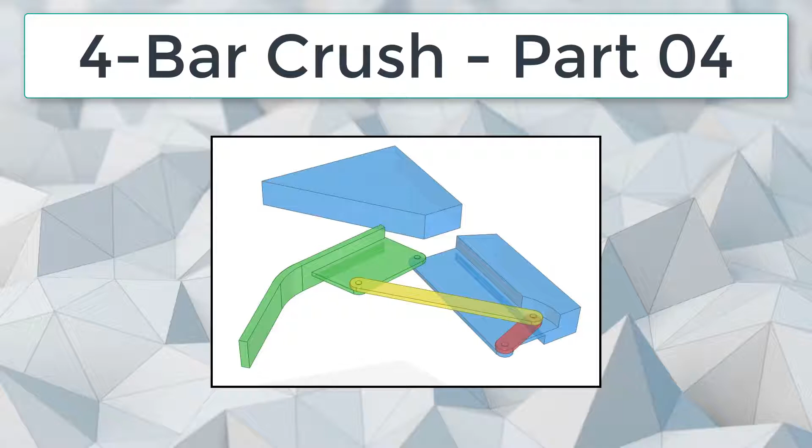Now, engineering is all about give and take, and while we might like this change, it's messed something else up right back here. This is interfering as this sweeps around. So how do we fix that?

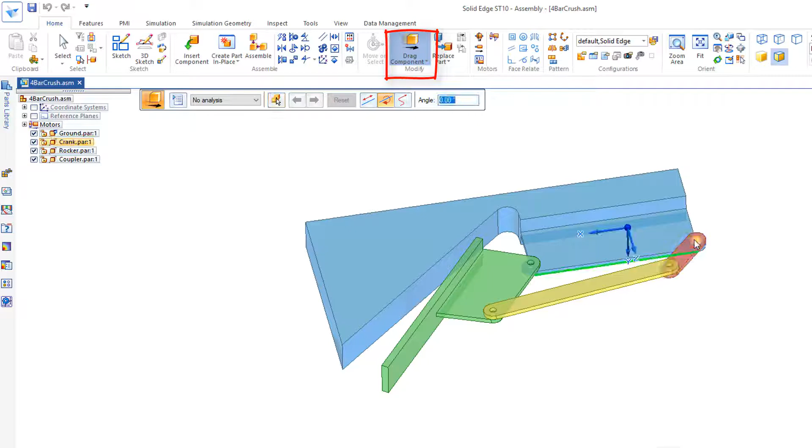Let's jump out of the motion. We can go back to drag component and just touch on that link and swing this around and look what's happening here. We'll swing that, hold it down. We can see it's interfering right there.

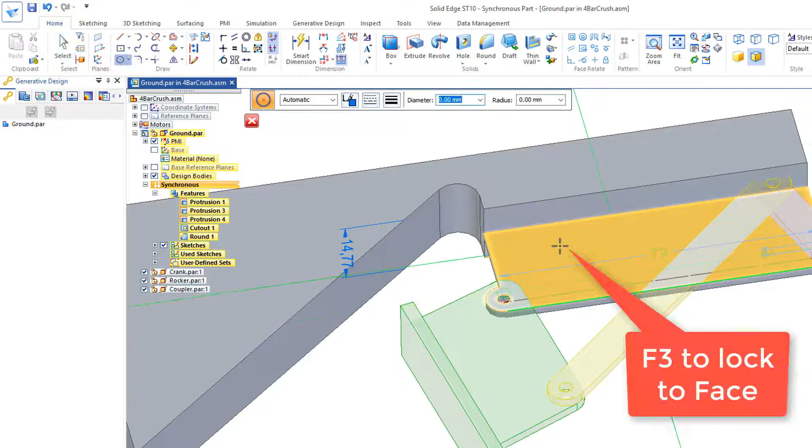So what we could do is go back here, open this part, and we could push this piece back, this face. We could simply push that back, or we might want to just add a circle. And I could just go on to this face right here, and I'll hit F3 to lock.

And I'll go back to the center of this circle right there. Maybe I'll look at that square on. Go back to sketch view and get the center of that. Just go out past that so it clears.

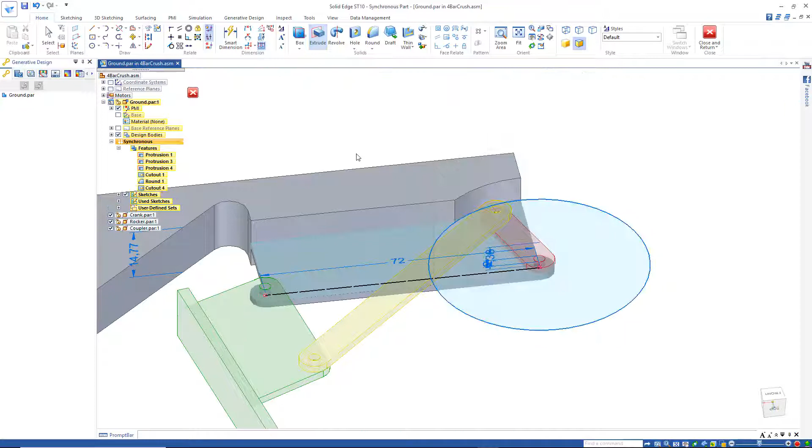So now when I come back, accept that region, push this up and make sure it's on take away. I want to cut away. And now when we run that, it should be okay. Let's just double check. We'll close and return.

Go back to motion. Now when we run motion, we'll see that clears okay.

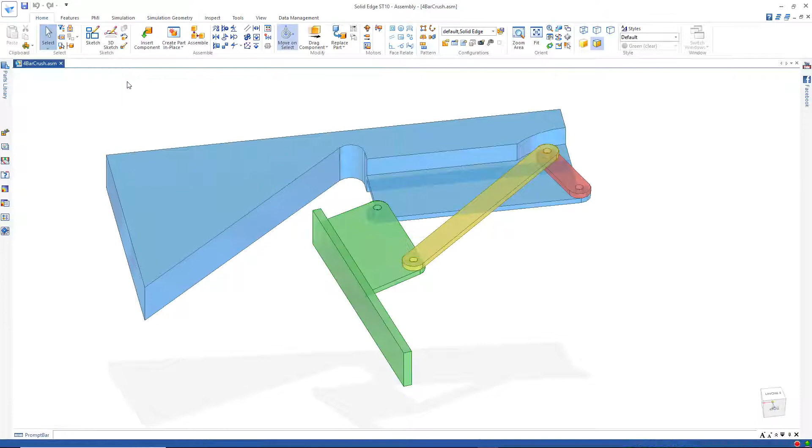Now, if we'd like to catch more material to crush, we might want to make adjustments to this arm right here. So I'm going to go in here to this face, and I'm just going to push that in. So let's just push that in, say 30.

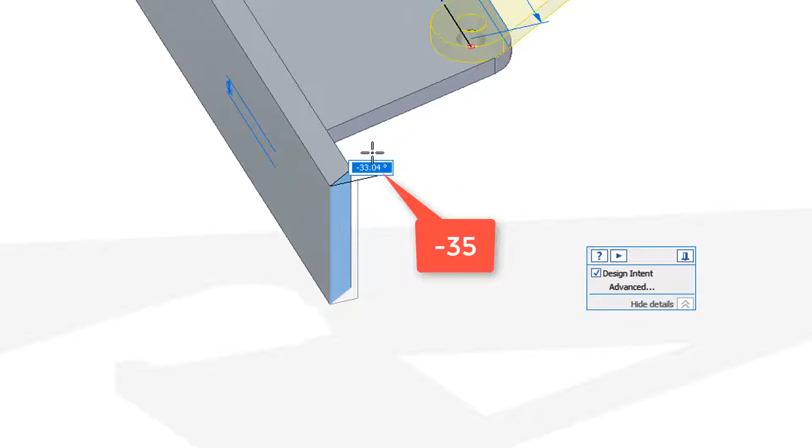And then I'm going to roll this around with the synchronous technology, this magic wheel. And I'll come up to this face right here, grab the magic wheel on this yellow part, and I'll spin that around. Let's spin that around, and it's negative, so let's go negative 35.

And then I'm going to go to the extrude button, select on extrude, and just pull that out. And let's pull that out to say 50.

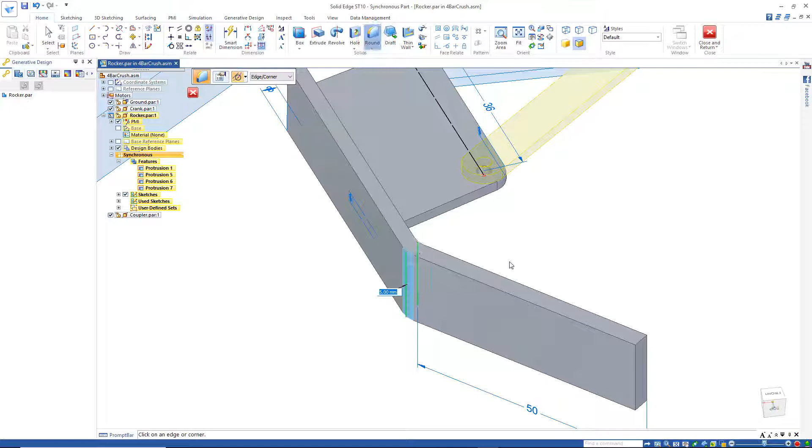And I might want to go in and add a round into this, round this edge and round this edge in there. Let's make that a little bigger, say 33. Let's go 27. And now I'll close and return and fit the view.

Let's go back to motion and run this again. Let's see what that looks like. And so now it might sweep things in a little easier.

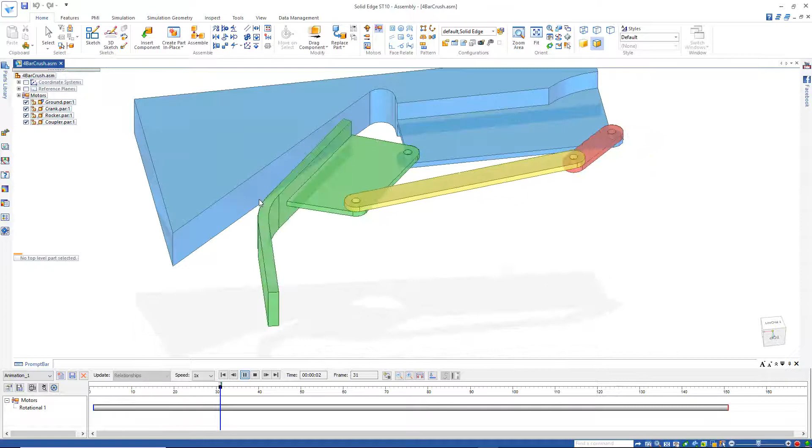Now, another area of concern with this design is, as this sweeps up the material and it gets crushed right here, where does it go? It's just going to build up here and it's got nowhere to go.

So let's go and close and return out of here, and we'd have to make adjustments here to this part. And so what could we do here?

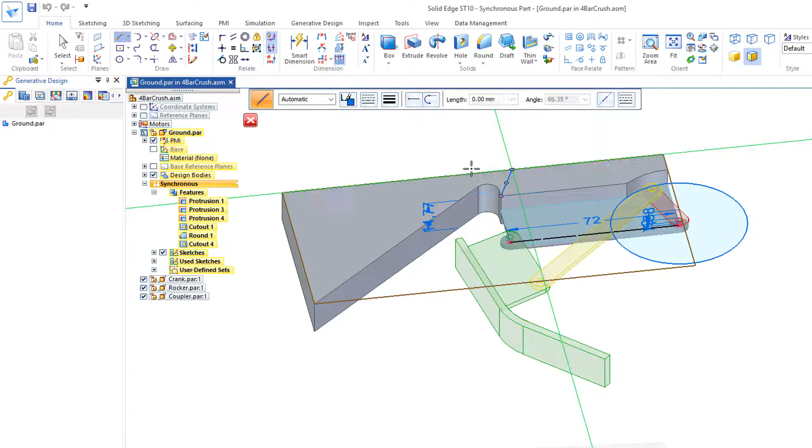We could simply come into this face and let's sketch on this face right here, and we could just draw a couple of lines back here and maybe another one back here. We could just cut out all this material. I'll go back to select, cut out this material.

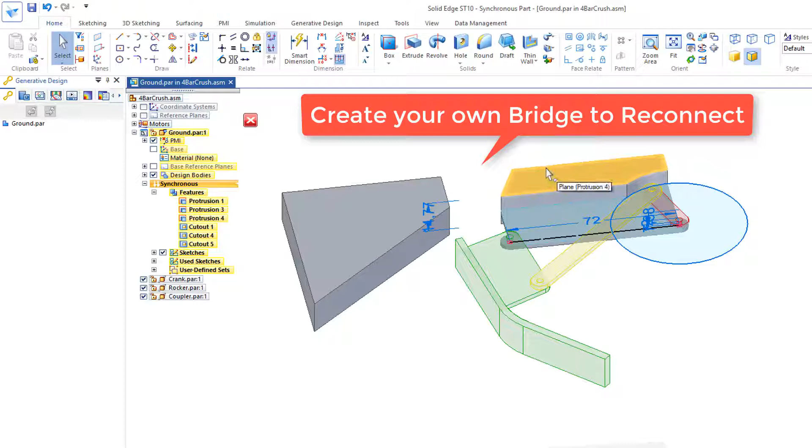And so it's got somewhere to escape. And then what you'd need to do is go and put some sort of bridge up here over the top of this. Something that would fit into your robot design.

So we'll just take one more look at this, and you might want to round some edges. We'll simulate motion one more time. And so it's got somewhere to escape.